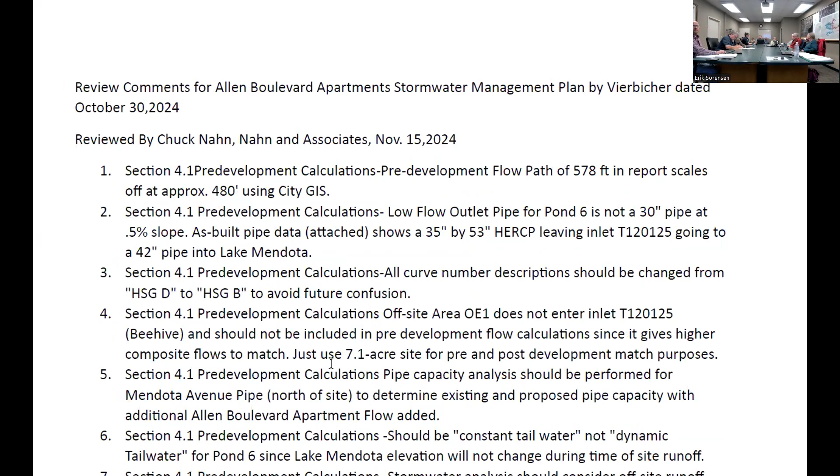Do you have some comments to make? Yeah, okay, my name is Chuck Nahn and I have been retained by the neighborhood association to do a review of the stormwater plan dated October 30th. And I have reviewed it. I have a number of comments that have been put into your packet. Some of these may be real minor comments. They can be easily remedied. Some of them might not be.

And I guess I would welcome the opportunity to sit down with Erik, assistant city engineer, Andrew, and also Elliot, maybe from the county, to work through each one of these items to determine how to remedy them, to address each one of those. Okay.

Oh, me? Okay. Dan Baruch, 6203 Lakeview Boulevard. Wanted to make sure that if you do consider fees in lieu for the Allen Boulevard site, that you keep in mind that in this stormwater ordinance it is written that if fees in lieu are accepted, there need to be management facilities downstream between the site and where the outflow is into the sensitive water body. And given the proximity of the site to Lake Mendota, I don't really understand how that could potentially happen. So just wanted to raise that issue.

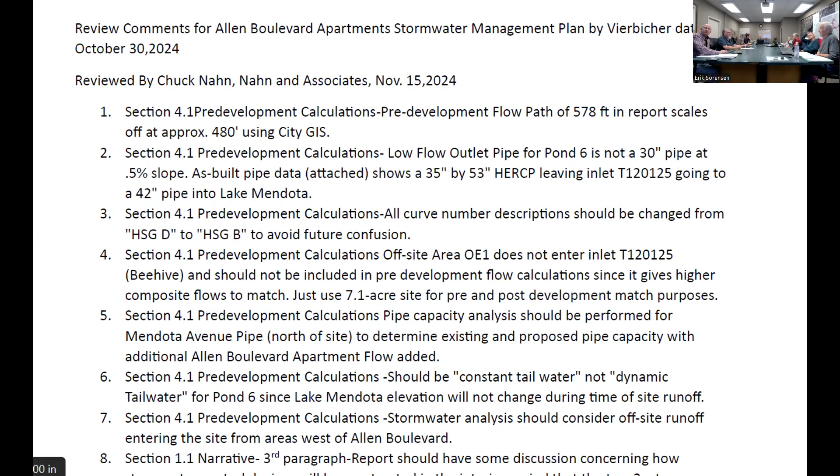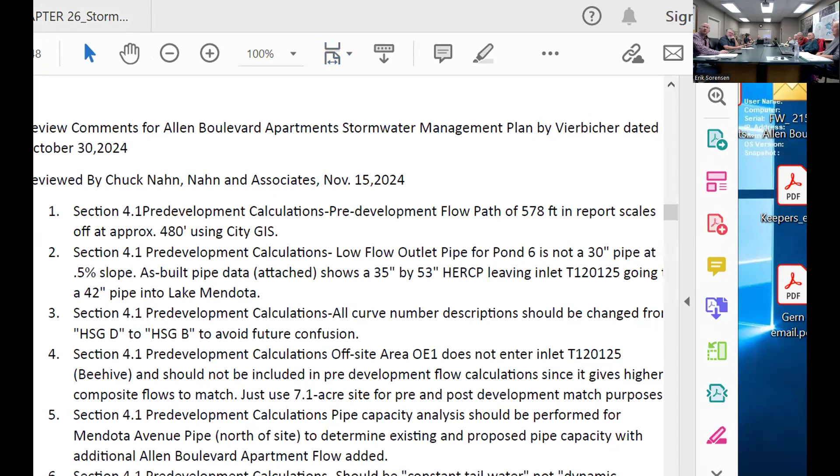I think that might apply to rate control, Warren, but not infiltration. We don't have to address it now, do we? We don't. No. If you want to look at it during the course of the meeting and find out. Well, yeah, I'm kind of stuck with my computer. Right, just can't do that. Any other comments? Okay, if not, then we'll go to presentation by the engineer.

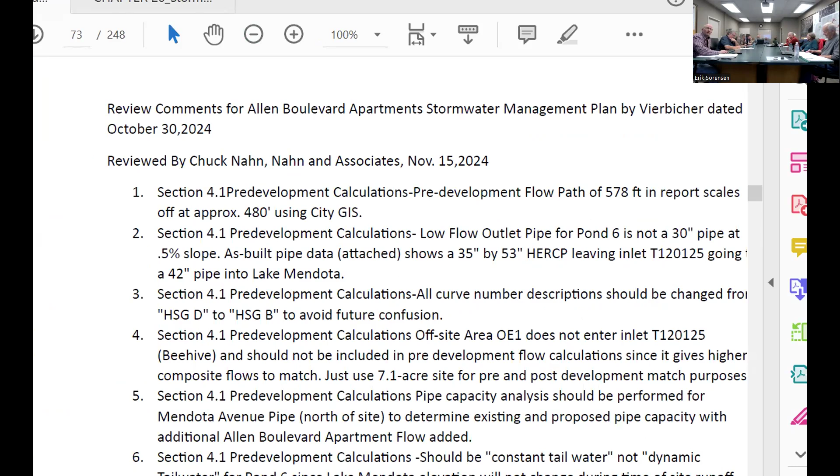Sounds good. I guess I'll start off by thanking everybody here for giving me the opportunity to run you through our stormwater management plan. Most of you are probably familiar with the site, but it's at the intersection of Allen Boulevard and Mendota Avenue. There's a CSM yet to be recorded that would divide the property into 4 parcels. 2 eastern parcels are lower density, western parcels are higher density.

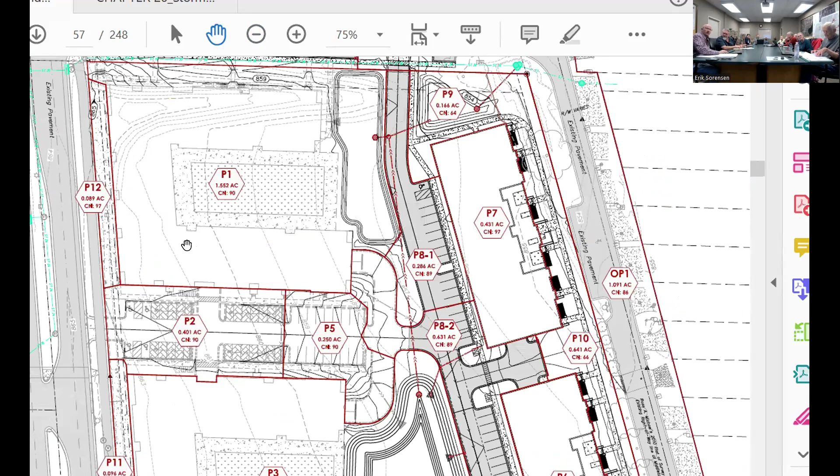And we've heard and listened to many comments and concerns from this commission as well as the neighborhood association. We have put together an extensive, thoughtful and detailed stormwater management plan for the site to try to meet and exceed the requirements for the property. We've also had many discussions and meetings with city staff, Dane County, and DNR staff to make sure that everything we're proposing here is part of the technical standards and is to the maximum extent practicable for this parcel.

I know one of the concerns when this property was discussed previously was with impervious surface ratios. I know maybe you wanted the zoning code to be a little bit lower than what it ended up being. We're certainly not pushing that envelope. Final impervious surface ratio is about 10% less than what would be allowed per the zoning code. We've also dedicated a large portion of this property to stormwater management to make sure that we're doing everything in our power to protect downstream bodies of water.

Typical site development in this community would commit 10 to 12% of the site to stormwater management. We're over 20%. And that's a large mix of different practices: bioretention, dry detention, wet detention, permeable pavement, green roof, and grass paver systems. Typically, when you request an infiltration exemption or recharge exemption, Dane County would require you to provide at least 2% of the site to infiltrative practices. We're almost 9%. Quite a bit above that minimum standard. Like I said, we're trying to do as much as we can.

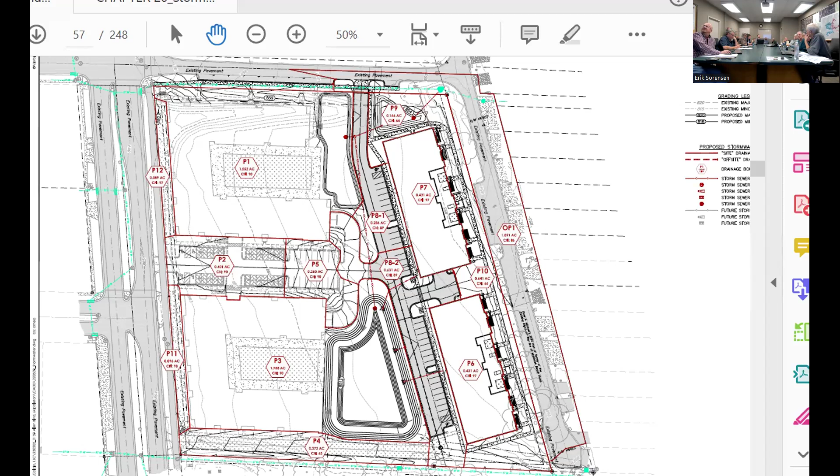And I think there are sites in the city where fees in lieu of shouldn't be allowed, or at least where the proposed stormwater management practices, I'm not convinced this is going to really solve the problems. If anything, make it worse.

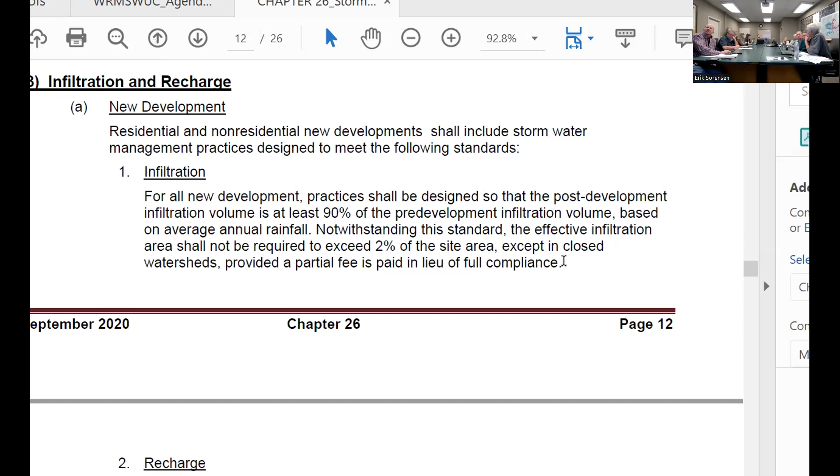I don't have an opinion on the fees in lieu. I see that the county and our staff have recommended approval of the fees in lieu request, and I would like to hear the rationale there. If fees in lieu are allowed in some cases and not in others, I think we need to have a really good reason, like a documentable reason, for granting it in some instances and not in others. So I would just throw that out there.

I'm curious, well, if we're talking about fees in lieu first, I can hold off on my other comments, but I did have some comments about the design and the pervious versus impervious surfaces.

You're absolutely right, but if we do not have concrete reasoning for what we're going to do as far as fees in lieu of, we are probably opening ourselves up to some conflict in some fashion, and I don't know what that'll be, but I don't really want Water Resources to be storming out, feeling like we've been trampled on. I think we need to try to come up with a good reason for what we're going to do, whatever that is.

I'll go along with all the comments so far. It's difficult to approve fees in lieu here, and yet the county seems to think it's okay. The county didn't approve fees in lieu, they just said the stormwater calculations are correct, you meet all the requirements except for this. Right. That's all. They don't say anything about fees in lieu; it's particular to the Middleton ordinance.

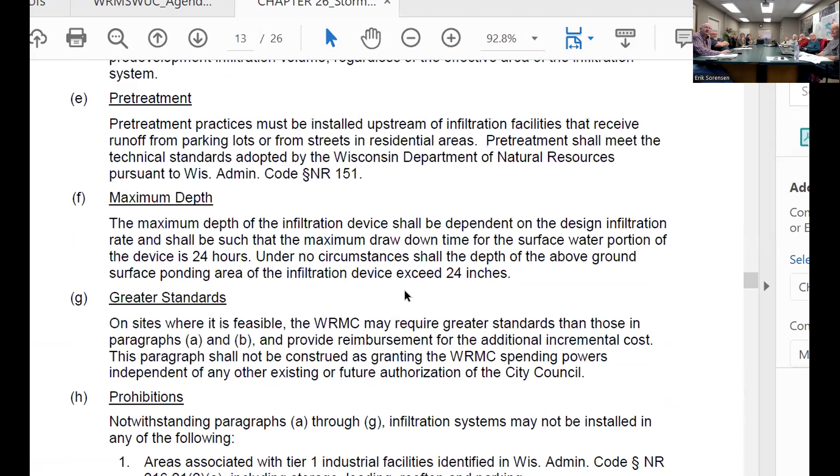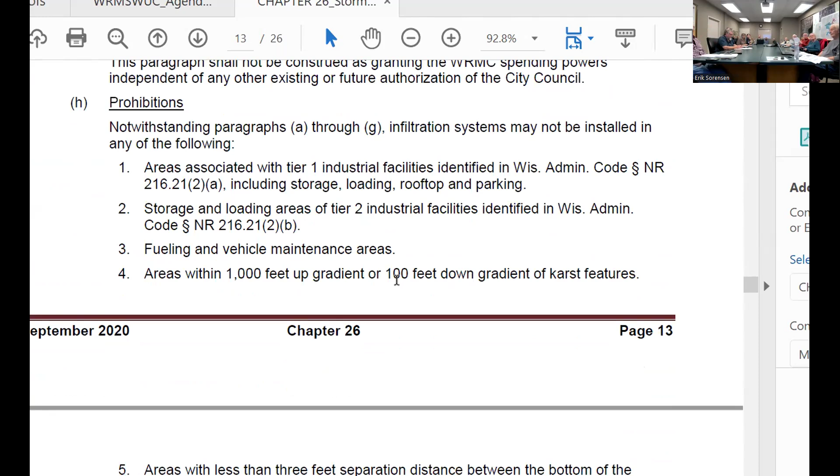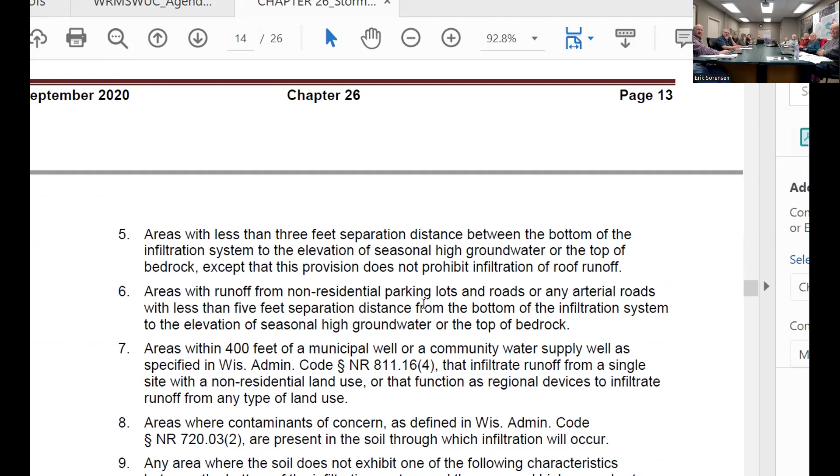Yes. And what I put up on the screen is a section of chapter 26. We're talking about the infiltration and recharge performance standards. We list these as prohibitions, and these are all the areas where we don't want to infiltrate water. What's applicable here are these soil condition restrictions, less than 3 feet of separation distance to high groundwater or bedrock. And then there's another one with 5 feet depending on the soil characteristics, and that's what the site's not meeting.

I think fees in lieu just kind of sounds bad, and when the public reads that, they think we're saying just give us money and you can get out of your requirements. That's not the way I see this. If we were in Verona or Sauk County or somewhere that doesn't have a fees in lieu standard, the site would still be exempt from infiltration due to the poor soils, but they wouldn't be paying any kind of fee in lieu.

When we had Greg Fries here on the ordinance, he talked about Madison; I believe they don't have fees in lieu of. And we asked Greg how they handled it. He said it was a discussion between the city engineering staff and the developer to meet the requirements, and they had a give and take type of procedure that they use. And that seems to make some sense. It gets rid of this feeling that we're just giving away something.

And I guess that's what I recommend here. We don't use fees in lieu of, but have the developer sit down with you and staff and find a way to come closer to meeting our requirement. I think the intent in the 3 years that I've been here is the developer makes a fees in lieu request, and then it has to come before this commission.

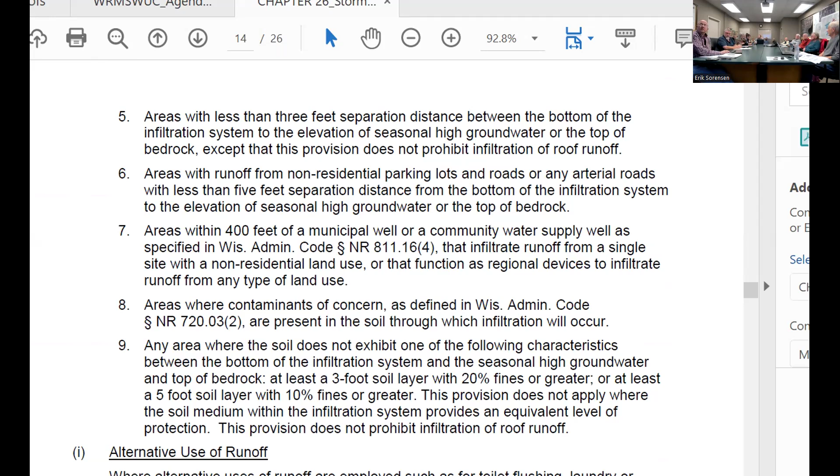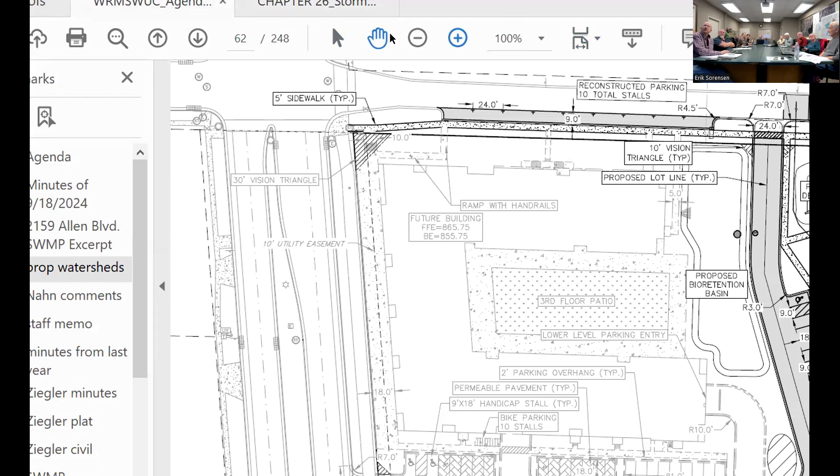Well, and that kind of tees up some questions I had about the design itself. Eric, can we go back to? So I'm looking at page 62. Okay, yep, and if you could zoom in. Much bigger than that. I had a question, so in the plan commission, our recommendation for one of the policy questions was to get rid of the perpendicular parking. And I think when I participated in that discussion, I pictured the parking going away and not necessarily being replaced with parallel parking. So are you planning to take that out?

What's shown here is to replace the perpendicular with parallel. That's what we gathered from that plan commission meeting. We're not using that parking for any parking requirements. We have no preference on whether it stays or goes. That's up to the city. We're gonna be doing work there, so if you want parallel, we're happy to make that replacement. Are you talking about on the road right of way? Yep. Right now, there's the perpendicular parking for soccer games and stuff.

But the question that came before the plan commission was, do we need to keep that now that there's going to be on-site parking and not soccer games? And we were inclined to say, no, get rid of the parking. I don't know if that's considered the right of way. It's right of way, right? I had heard that the intent was for some kind of first floor retail, and that was the desire to keep some amount of parking. Well, but isn't there going to be parking for the commercial on site? So that's not needed. And in front of the apartments, did you want the parking there? We don't need it. We're open to whatever the city and neighborhood would like to do there.

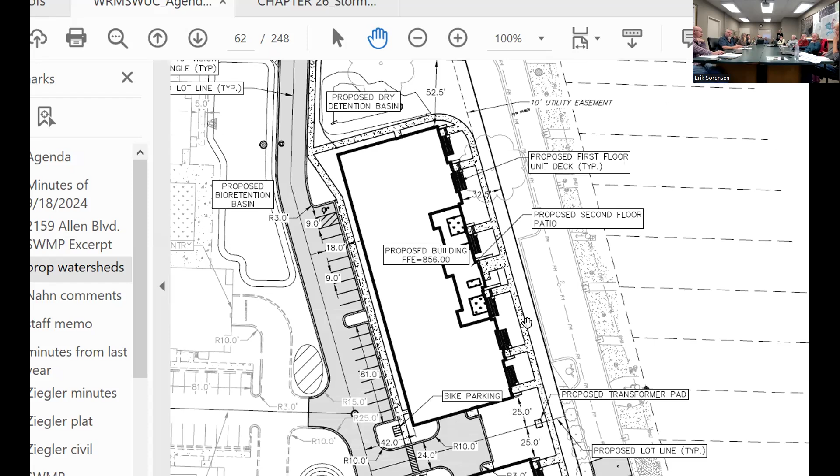I just want to clarify one more thing. On that parallel parking that Lisa referred to on the street, that is not even part of our runoff calculation requirements. They're outside the property boundary, right? Correct. That is an issue to be decided because, as this is shown, there is a reduction in impervious, even though it's within the street right of way. Same thing would happen over here.

And the sidewalk too, one of the comments from engineering was that sidewalk should go around. Right. We would prefer to have this sidewalk placed into the right of way. So when I said in my memo I have numerous comments, they are details similar to what Chuck Nahn provided, which is probably too much for this committee to get into. And there's a lot of things still in play here with the land division, with what happens within the right of way. To me, it's all part of the same design. If we're adjusting how we treat what's their impervious, what's our impervious, what they're responsible for, what the ordinance requires, that gets pretty tricky.

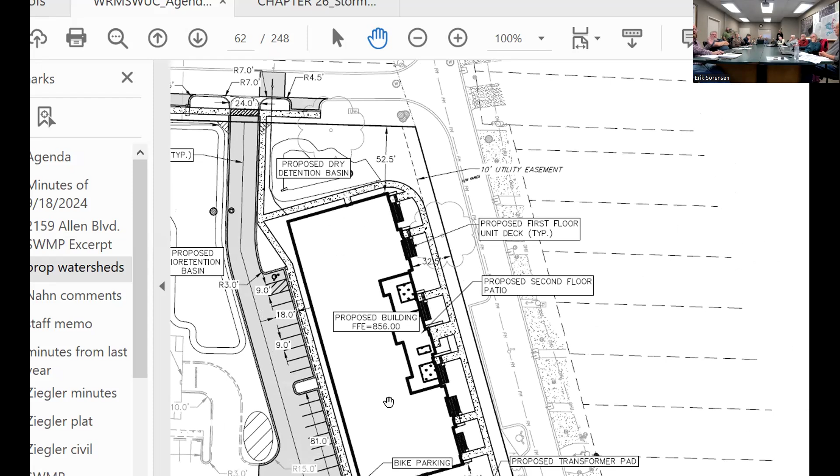But I think I've expressed my main concern with this site is what happens to the receiving storm sewer. Middleton Beach Road is gonna act as a dam after you get above a certain storm event, and there's no real good way to fix that at this point. So this needs to be the point of comparison, what's happening along Middleton Beach Road, making sure we're not exceeding what's happening now with storm flows, flood flows, because there are no culverts under Middleton Road. Well, there's a culvert through here that goes to the lake.

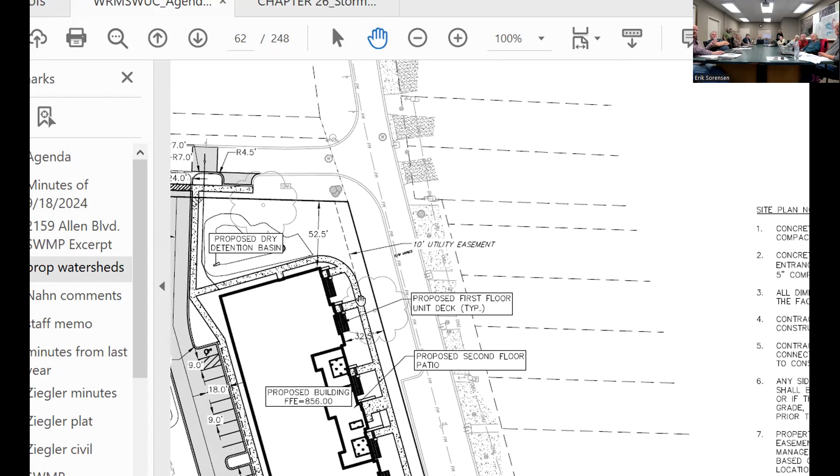Maybe if you'll indulge me. This is a map I prepared a couple of years ago. This site is right here. Each one of these little nubs is a storm pipe. So we've got one right along the edge of Marshall Park. We've got one that comes down Mendota, and that's got the smallest watershed associated with it. And then the biggest one is a pair of twin pipes that come through right here, kind of opposite of Maywood. So it's what's happening with this watershed, that's the concern. You can't enlarge that culvert at the upper end of that. We don't have enough space to do hardly anything at all.

You mentioned to me that the 200-year flood actually shows an increase. Is that right? I think I might have said that the design Drew provided still shows slight increases at the point where I want to make the comparison, which is the 30-inch pipe right before it passes underneath Middleton Beach, right here. And using the present 100-year flood calculation, we've already realized that probably is not accurate because they're using rainfall data that's probably outdated, and the 200-year flood is probably more like the 100-year flood. Well, we're required to go up to the 200-year now, because that's what the county ordinance says, so we have to follow that too. So that's a concern that can't be rectified with this plan.

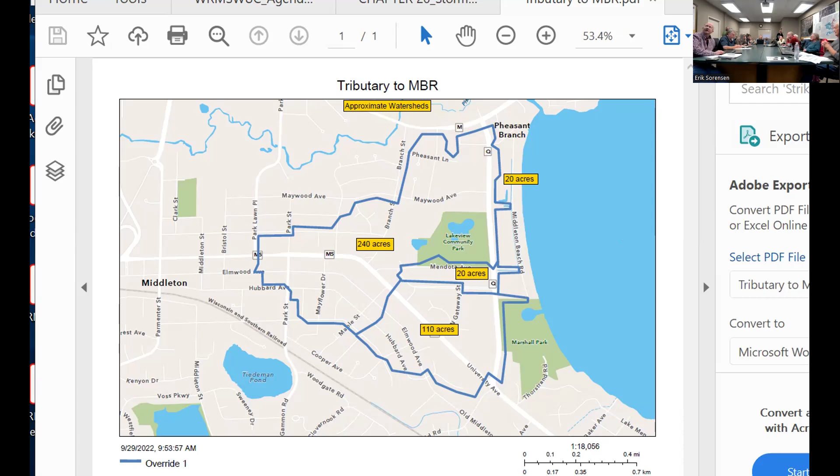Aren't you matching the 200-year event? I was gonna say, Eric, can you show us where in the packet? Because I thought it was all but the 1-year storm. But 1 year's a problem too. And you had said, Eric, with some of the changes you were gonna suggest, possibly the 2-year. Yeah, we're talking about two different points of comparison. Okay.

I have this bookmarked in this version. Page 4, yeah, you're at. So I think, and Drew, maybe you can correct me if I'm wrong, the depression represents that point of comparison that I'm talking about. Correct, yeah. Oh, well, I stand corrected. He is underneath it. Yeah.

But that is only what's overtopping. That's the overflow line, the secondary. Total discharge is what's coming through the pipe and overflow, and that is also decreased in the 100, 200 year. Okay, I stand corrected. Where's the overflow point? The overflow point that I found is a couple of lots south of Mendota Avenue. It's very flat in there. It's either directly over that storm pipe or it's a couple of lots south of that storm pipe.

Yeah, and there could be multiple overflows. We could try to shunt some water across Mendota and push it into the wetland. There would be impacts to that. Yes. Pipes that exist up there, I assume, are pretty much flat pipes, right? Not much grade to them. Correct, and they're all partially submerged, no matter what the lake condition is. Fully submerged, I think, when it's at flood elevation. How do you get water through it? You have to pile the water higher on the upstream end.

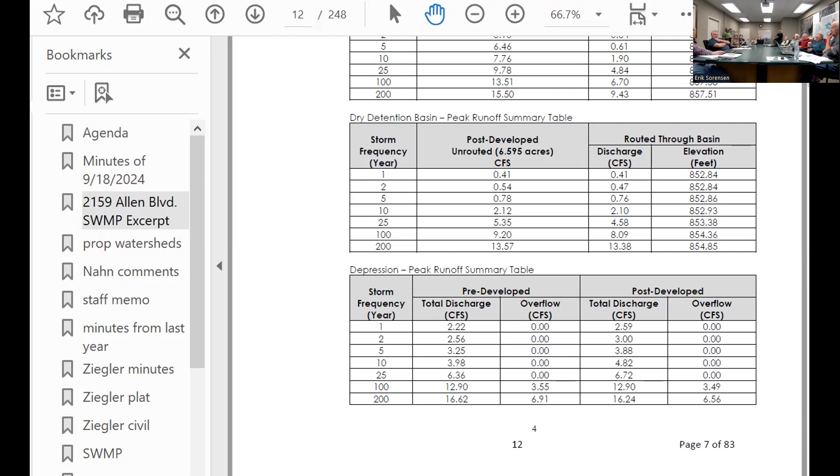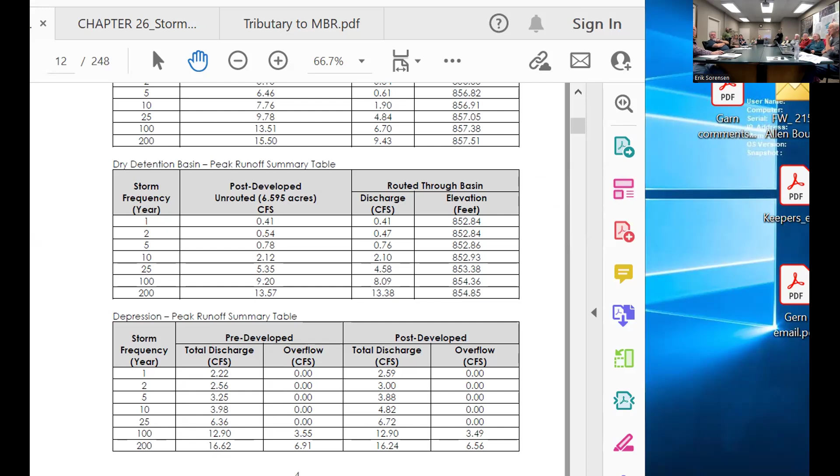We were sent pictures of one of the residents on Middleton Beach Road of flooding that occurred this summer. Was that overflowing Middleton Beach Road at that time or just ponded on the soccer field? In one of the emails I forwarded to you guys, the resident was talking about overtopping between his house and the neighbors. This set of pictures is primarily the west side of Middleton Beach Road in the tree line, and it's a poorly drained ditch. We cannot solve all the problems on Middleton Beach Road, certainly not with this project. We don't want to make it worse. Exactly. That's the intent, to not make it worse.

So I think the report shows that we're matching or improving conditions for all those peak flow events except for the smallest of storms. And the only reason that we cannot meet those is because of that small area that we're not able to capture, because it's directly coming out to the road. You're improving it because of the storage basins that are planned. Yeah, the extensive storage basins. Like I said, 20% of the site is committed to stormwater management.

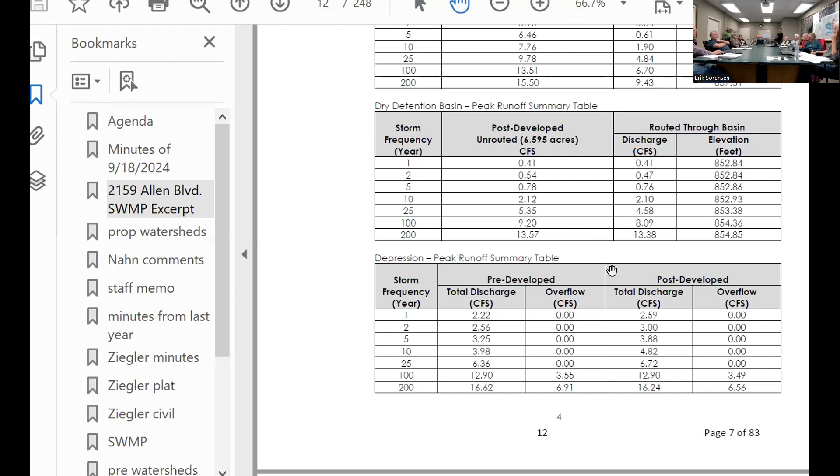What kind of landscaping will you have? Because I know the chair was talking about evapotranspiration, and I think your calculations assume that anything that's not impervious would be lawn. Right. Yeah, we have an extensive landscape plan. Our landscape architect loves using perennials and trees and shrubs. What about native plants? Yep, lots of native plants. I can definitely share this plan with you. The root length, that will make a difference. Yeah, that's why we would go with perennials and native plants. Turf grass doesn't infiltrate very well. Right. That's why my proposal is for green infrastructure. Work with the city and try to improve that, so you come closer to meeting the infiltration requirements.

Yeah, and we would love to expand these basins, but we're just controlled by that groundwater. There's areas we're not allowed to infiltrate. And higher by Allen Boulevard, it's impossible to do any kind of infiltration or porous pavement up there because there's no water to capture. Right, yep. That's the upstream side of the site, so it's hard to make water go upstream.

Are you planning on a liner for the pervious pavement? Pervious pavement will not have a liner. Where we placed it, we have the required separation. The only place that we have a liner planned is the bioretention basin, again just because the groundwater is shallow in that location. We don't have the required separations for DNR. So this is the bioretention basin and bays of pervious pavement. And if you notice, they're relatively high, and the parking lot dives down quickly to this lower tier of the site. And these roofs are draining back into the ponds. As he's shown it, the only thing that's draining towards Middleton Beach Road directly is just the face of the building to the east.

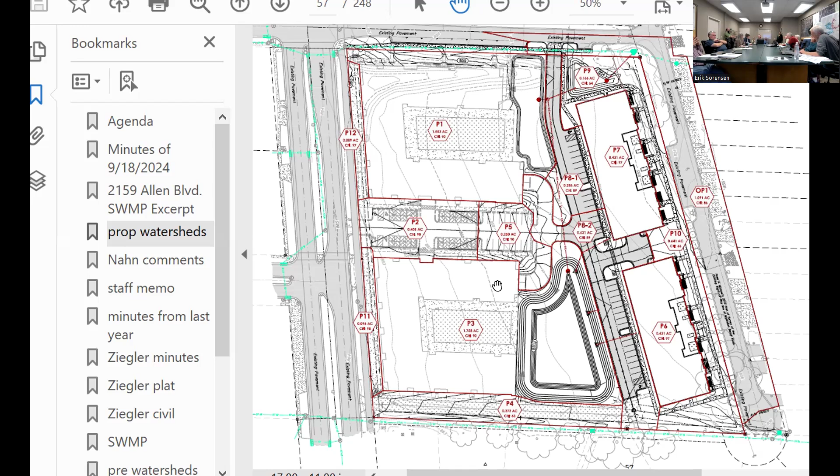About 5% of the site is green. Not 5% of the buildings, 5% of the entire property. What percentage of the buildings? I don't have that specific number. I know that on the larger buildings, we're proposing that 50% of the amenity space, that middle section, is green. We show roughly on current plans where those green roofs are planned. In addition to the green roof, over 1% is porous pavement, 3% is grass pavers, 3% is bioretention.

In addition to that, kind of non-green, if you will, would be 8% wet pond and 1% dry pond, I guess over 20% of the site committed to stormwater management, well in excess, almost double of what you would typically see on a property of 10 to 12%.

I have another question. What are you going to do to keep any water from going into the wetlands on the other side? That's not what the drainage pattern does. The drainage pattern overtops Mendota in the extreme large events, as it does currently. Or, sorry, Middleton Beach Road, yes. Yeah, the city has worked on restoring it. It needs a lot more work, but it's a very fragile, unique, perhaps a calcareous fen even, which is very rare. So we don't want to do anything that will damage that.

But there is no drainage to the north on this. No, but I'm talking sideways. Yeah, to the north. If it goes over the road, it will go into there. No, I don't think so. No, it goes east, across the road, as it does. Right now, I think, Susan, there's maybe 6 inches of difference between where it overtops Mendota Avenue versus where it first overtops Middleton Beach Road. Okay, so a huge flood could be a problem. Yeah, 2018, perhaps. It's a problem all over the place.

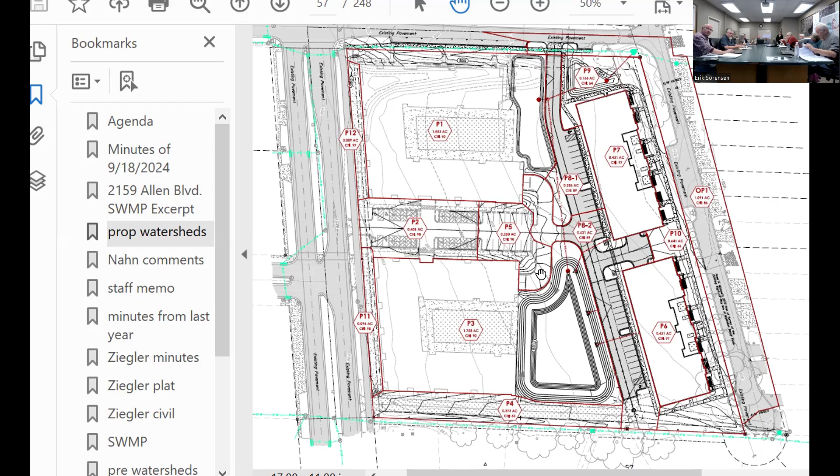Yeah, so the 1-year right now is a quarter CFS; under post-development it'd be 0.48 CFS, right? And the 2-year would be 0.6 in pre-development and 0.68 in post-development. 0.63 of that just being the portion along Middleton Beach. We think we can measure these things like this. Right, exactly. And if we were to use the C or D soil comparison, we wouldn't even have this problem. We'd be meeting those peak flow limits. I know, but numbers are numbers.

Those two numbers, as far as impacts go, don't bother me at all, and if it's a fee in lieu, that'll get around that. Or are you asking Eric that there would be some changes in the curve numbers and recalculate this table? Yeah. And then those new numbers would be missing the 2-year storm also. See that 0.08 increase. The 1 year doesn't change very significantly. I always think a quarter CFS is a 4-inch drain tile. That's about the flow out of it. Okay, just to help visualize.

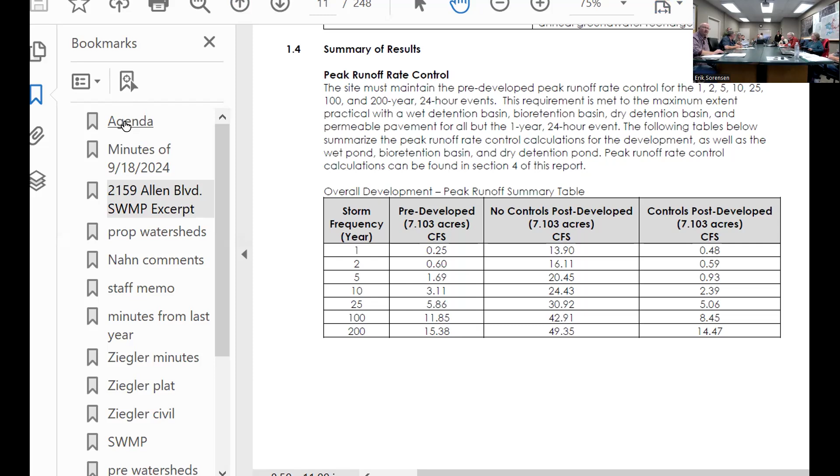For now. We've kept it going like an hour. Yes, I think we should take a recess, a short one? About 10 minutes? 5? Thank you, Lisa. 5 minutes. I'll second.

Thanks, Chuck. No, it was not. Thank you. There's still people in there. Getting a little warm in here. It's small. It was warm when we got in here. Well, that's perfect. I wasn't expecting that much. Why don't you come up to the table? Got to be a more comfortable chair. I was taking care of the little one that day. $2,000-3,000 here and there. No, I asked for the Greenway Center.

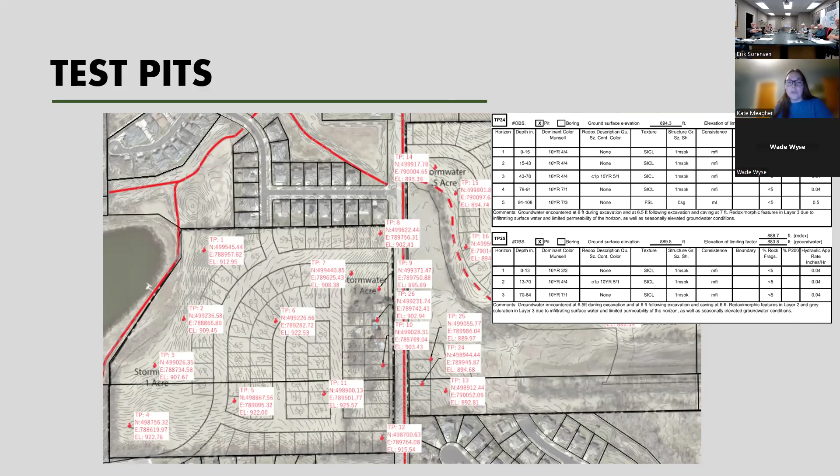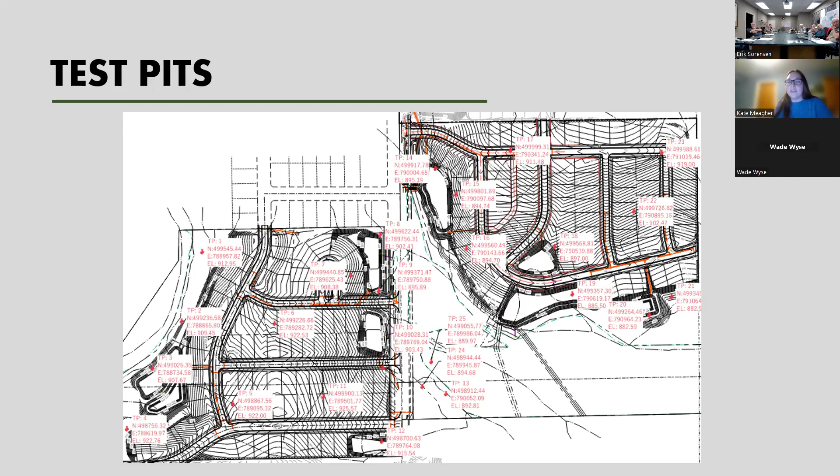So you can see these test pits 25, 24, and 13 are in this corner. And in this corner, there was previously development shown, but the infiltration rates here were low, and there was a high elevation of seasonal groundwater. And so we looked at multiple layouts, but ultimately development of this area was removed due to the restrictions of the infiltration. So this is kind of just an example: here's the current layout with the same test pits, and now there's no development there, and how the information of the soils has really guided the development of this plat.

So this is our proposed watersheds. So again, there's the 2 major watersheds. There's the Graber Pond to the west and High Road and the eastern drainage way to the east. The eastern ones of High Road and the eastern drainage way were separated for the peak rate, just to maintain that the High Road peak rates were not going to overtop High Road.

So for the western watershed, there's a wet pond and infiltration basin. Along High Road, there are 3 bioretention basins, and they capture runoff from this area as well as the discharge from this existing pond in the Spring Hill Estates. And on the east side, there's 2 bioretention basins, a wet pond, and an infiltration basin.

And the storm sewer from Red Tail Ridge, which discharges in this northwest corner up here, as well as discharge from the overflow of Graber Pond and Misty Valley, are all going to be passed safely through the site, but not captured by any stormwater management.

So the first requirement was peak runoff rate. And so the peak runoff rate modeling, again, was split up to analyze pre and post for the Graber Pond watershed, the High Road, and the east of High Road, that drainage way area. There was a small increase to the eastern drainage way, but that's just due to the areas that cannot be captured by any stormwater management facility due to the grading of raising the basins high enough so that they have separation distance from the groundwater levels. And when combined with the High Road and the overall total site, which is where everything eventually drains eastward anyways, there's no increases to the overall site.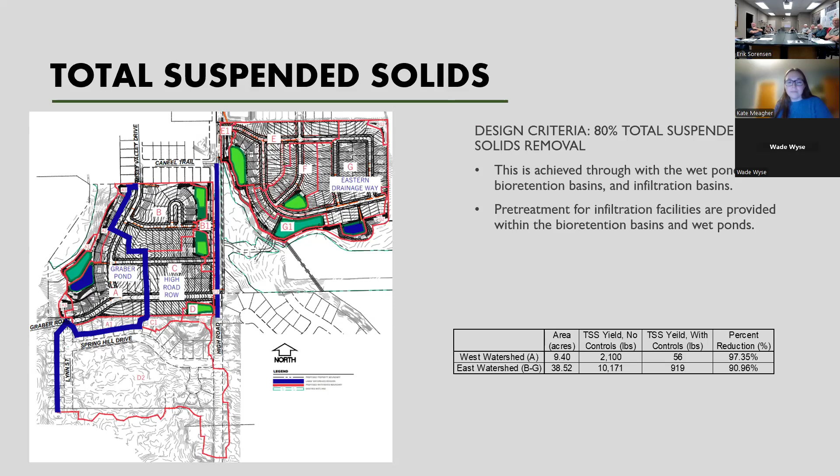And the last part is stay-on. To get to stay-on for 100%, we are assuming, based on previous developments in this area, that 100% pre-development stay-on is going to be required for this site. To reach that, we are requesting the credit of the infiltration of offsite runoff to meet that 100% goal.

In doing so, we've talked with the city about how much credit we can take for the offsite runoff. The credit we've talked about is that we can only take credit for runoff volume over the 100% pre-development stay-on volume. So the offsite runoff has been restricted to assume that the offsite areas are meeting the stay-on assumptions listed.

Using these assumptions reduces the amount of runoff draining to the site. So this reduces the amount of runoff provided on site to those offsite areas, and this provides a more conservative estimation of the amount of infiltration provided to the offsite areas. While the offsite areas are completely developed and currently have no specific infiltration features, I think later on you're discussing potential improvements to the Spring Hill Estates Pond to maybe help provide infiltration.

But given that there's no current infiltration, it's going to be hard to reach that 90% goal. But we're assuming that it is reaching that 90% stay-on goal, and so only the runoff volume beyond that is being calculated as running off onto our site to take credit for that infiltration.

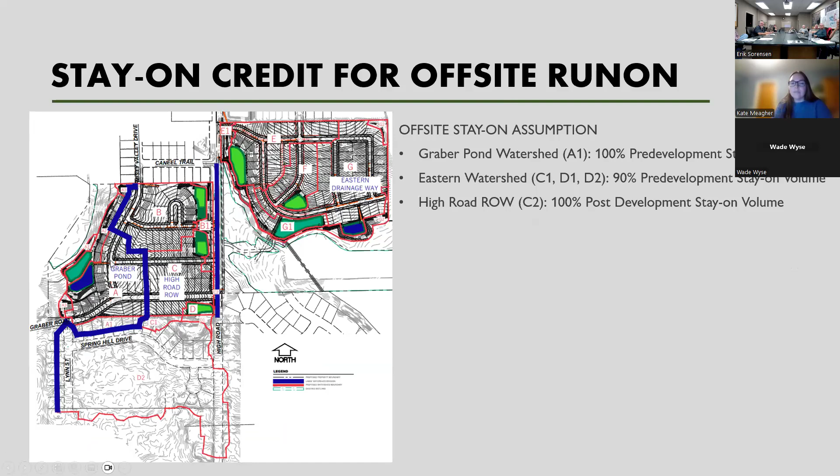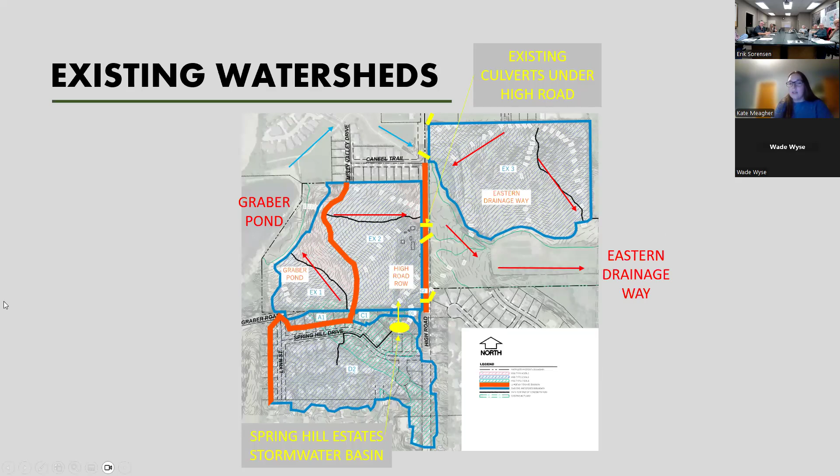Just to clarify, the surface watershed divide between Graber Pond and the rest of the site, is that pretty much following what the current topography shows? Yep, it's pretty consistent. I'm trying to go back a couple slides. So this is the existing Graber Pond watershed, and this is the proposed. You can see in this graphic the pre versus post. The pre-development one has 8.9 acres. The post-development one has 9.4 acres. So there's a slight increase to the watershed.

Kate, I have a question. There's no additional water going into Graber's Pond then from this development? That watershed just got bigger by half an acre. Yep. That's what I thought he said. Yeah, okay, you're right, you're right. So you look at impact on Graber's Pond, then it would be nil as far as this development's concerned.

Well, it would be nil for the infiltration level events. But in a 100-year storm, you'd have a half acre more of volume, plus all the additional volume from the impervious area of the development. Yeah. So over the course of the year, we will see more water going into Graber's Pond. Not over the course of an average annual year, on the 1-year frequency. But yeah, same problem as we've had with anything else, any storm that's roughly above a 2-year, there's more volume over the surface and into Graber.

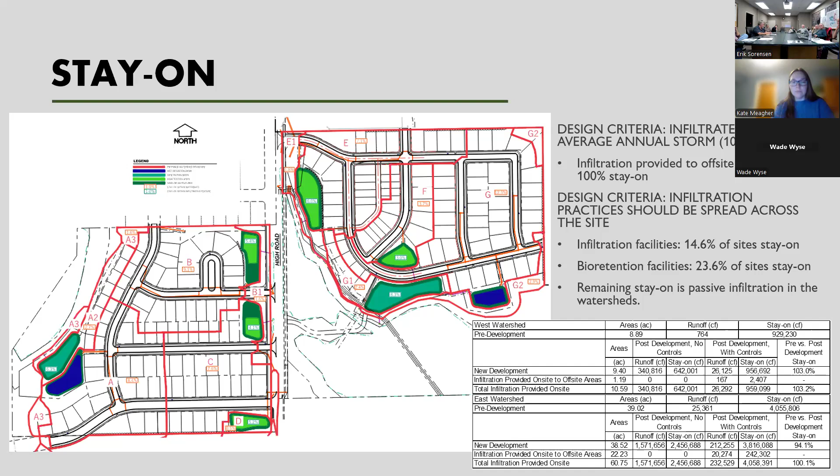Hey, can you go back to maybe your second or third slide? Yes. All the former Ziegler property is now conservancy lands, all the way over to Branch. Yeah, there's one sliver that belongs to the city, and then there's another larger parcel. Yeah, that one. It's owned, but it's owned by a defunct development company. And it'd be great if the city could acquire that. Yes.

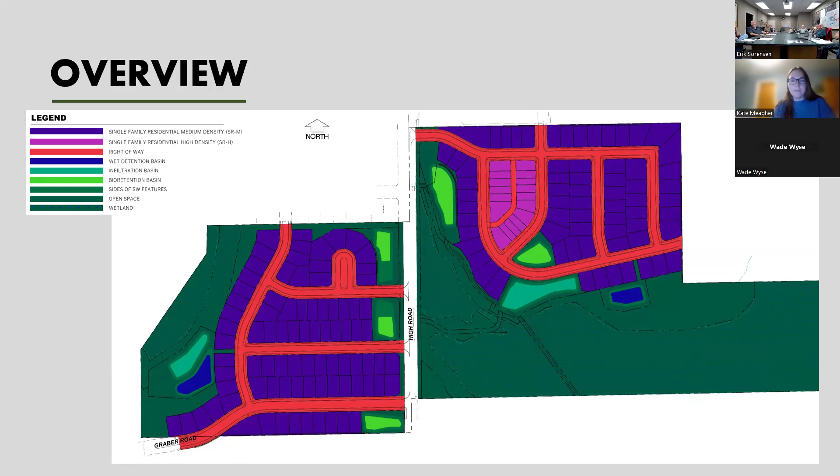So the right-hand border of that green rectangle, is that basically Pheasant Branch Road? I think it might be cut off. It is a little cut off, but it goes, yeah. Okay. Yeah, it's slightly cut off, but Eric, if you let me share, I can show a graphic that I think describes what you're looking at. You can share. Okay.

This is kind of the concept plan that's been routed around and discussed at all the other committees. So you can see, yes, the Ziegler property extends over to Pheasant Branch Road in this location. The tract of land that's potentially being pursued off-site and not part of the Ziegler land is this area down here. It's being pursued in discussions with the city. It's an outlot for the Pheasant Branch Ridge subdivision, but it's the former development company, and it's not in business anymore. Is the land developable? It's all wetland. We zoned it as conservancy as well.

So that's the area that water flows through. There's no channel now? No, the channel is located on the Ziegler property, and then there's a couple of side draws that bring it to the north from Pheasant Branch Ridge. It doesn't flow through the middle of this area here. No, right where it's showing. Its culvert then is here. Yep. Is that culvert gonna be big enough?

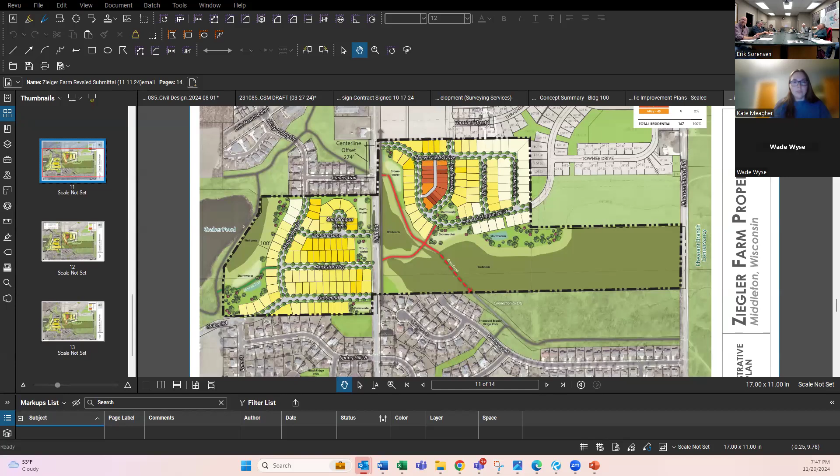Thanks, everyone. Thank you. Thanks, Wade. Okay.

Next item then is, I'm at 10. It's a presentation from MSA on a contract amendment to do a lot of work for what I'm calling the Graber Greenway. Jeff Felland is here. Jeff, why don't you make a presentation? And then I'll have a couple things to add, maybe. Okay. Or I might jump in. Good evening, everyone. Nice to see you all.

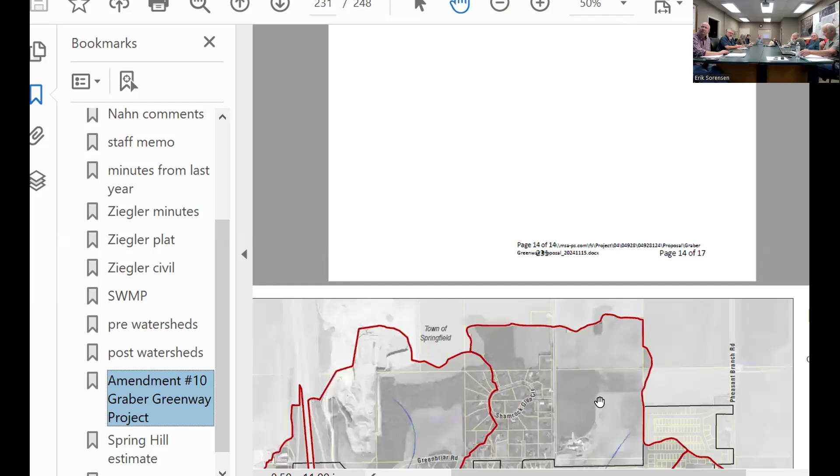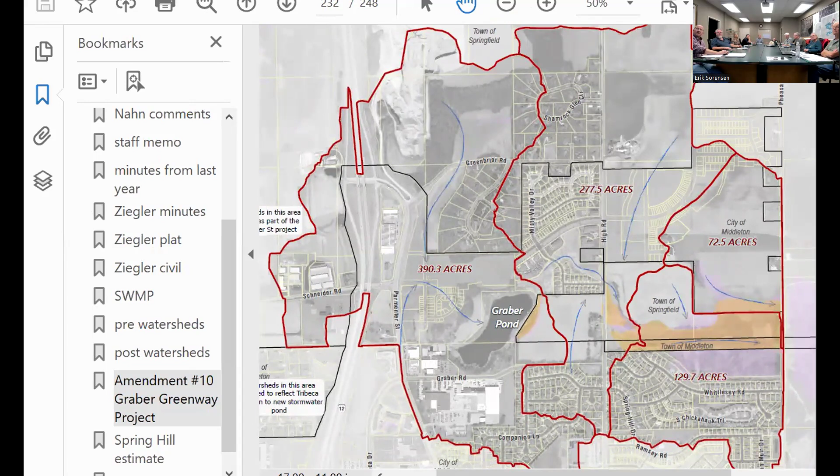So at Eric's request, MSA has put together a proposed amendment to an existing contract that covered Graber and Tiedemann Pond outlet studies or flood elevation studies. So as he mentioned, this is more of a watershed level of projects comprised of a number of different stormwater management and habitat enhancement features. The figure Eric has up there now is the current Graber and portions of the Pheasant Branch watershed that really encompasses this idea as we're going to define it today.

But before we get into the details of the components of this amendment, I want to go back a little bit and revisit MSA's partnership with the city in this region. Our first efforts in this area were back in 2016 when we looked at a few stormwater management ponds at the south end of this figure. They were talking about that in the previous one, Spring Hill Drive, Pheasant Branch Ridge, Spring Hill Road. There's some existing ponds, the two Pheasant Branch Ridge ponds, and further west that the previous presenter was discussing. We did some evaluations of those ponds for retrofitting to get improved stormwater management.

Our work specific to Graber Pond in the Graber Pond watershed started in 2019, where we had a contract looking at establishing and evaluating flood elevations in both Tiedemann Pond and Graber Pond. That was due to the flooding that was being experienced at National Electrostatics, the southwest corner of Graber, and then also some residential homes along the overflow path between the pond outlet and Misty Valley Drive. The city was looking at studying a way to design and implement an outlet structure for Graber Pond to try to reduce that flood risk for those properties.

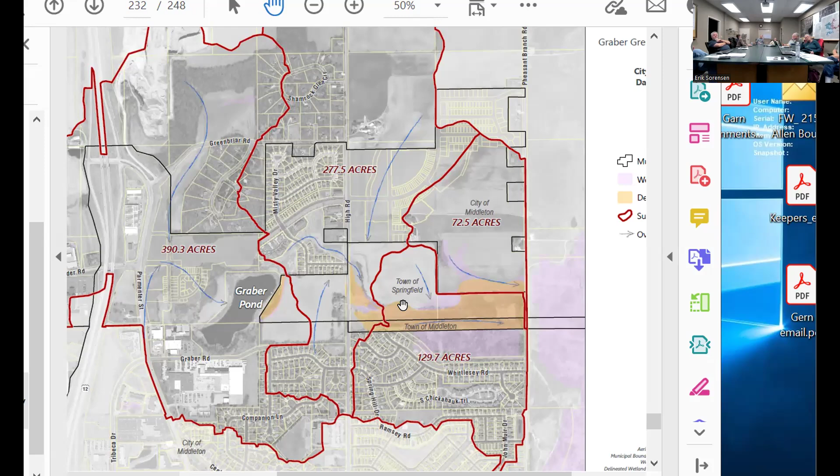properties along the greenway. So then there's another map, Eric, the next map that shows some labeled polygons. And this is really a map to help you all understand where these components are within the greenway. And so real quickly, I'll run through what the component is, what the issues are, and then what the expected benefits would be to implementing the proposed project component. So again, starting off with number one there, that's a combination of the Graber Pond outlet structure and the Misty Valley Drive culvert upgrades.

So that effort would entail working with the DNR, figuring out whether a lake level order or a public rights stage would be established, so that we can use that as a boundary condition, or continue discussions with them to allow an outlet invert below that level. And then improve the culvert capacity at Misty Valley Drive. So the outlet structure and the culvert upgrades in conjunction would be implemented to reduce flood risk at National Electrostatics and some of the houses along that overflow path just upstream of Misty Valley Drive.

The second component is the Misty Valley Stormwater Complex. So we would be evaluating the performance of that complex as a whole to see if it is still providing the stormwater management it was designed to provide and was stipulated under the stormwater management plan that led to the permitting for it. For component number two, the city has asked MSA to examine an infiltration basin that doesn't appear to be infiltrating per the original design. So we'd be doing some test pits within that to evaluate the soils and see if the infiltration is, in fact, being limited.

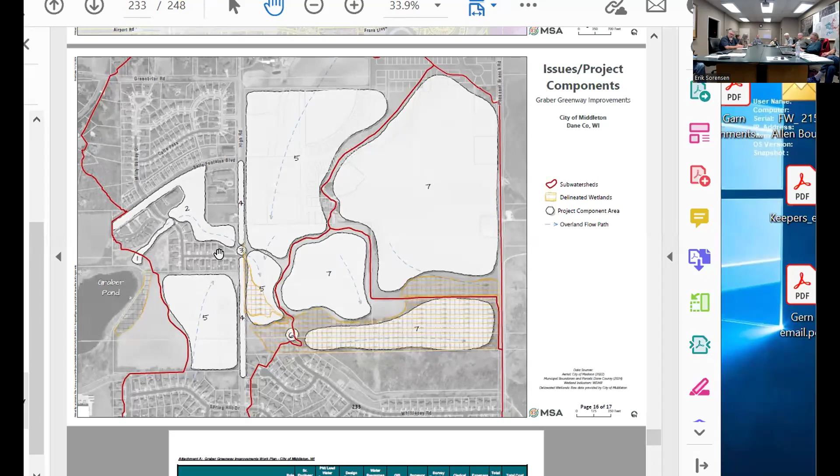So that brings us to that wetland shown in the middle polygon labeled with the label number 5, just to the east of High Road. I think this was discussed in the previous presentation. So the idea here would be to enhance and restore the existing wetland there. There's some adjacent areas that are being used for agricultural purposes. We have to be careful that it's not proposing to expand them, but to restore and enhance what's there.

And the idea is trying to implement some grading practices, sometimes known as a wetland scrape, to try to increase the volume available there, to attenuate some flow and allow a little bit more sediment settling to improve water quality. You'll note that there are a couple of larger number 5 polygons. These represent areas from the Ziegler Farm and the Red Tail Hawk development that will be draining or outletting to this wetland. So to your earlier comment, Lisa, the expectation is that there'll be additional volume coming into this wetland area. And if we can make some improvements and enhancements to that wetland area to accommodate some of that increased volume, that would be the goal.

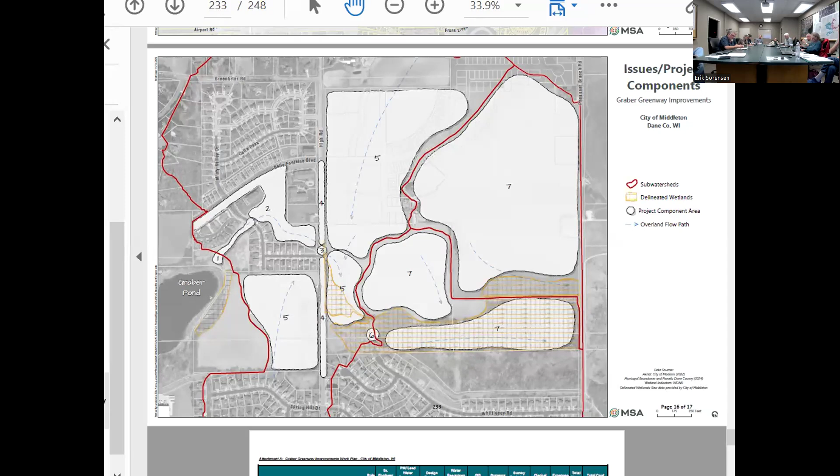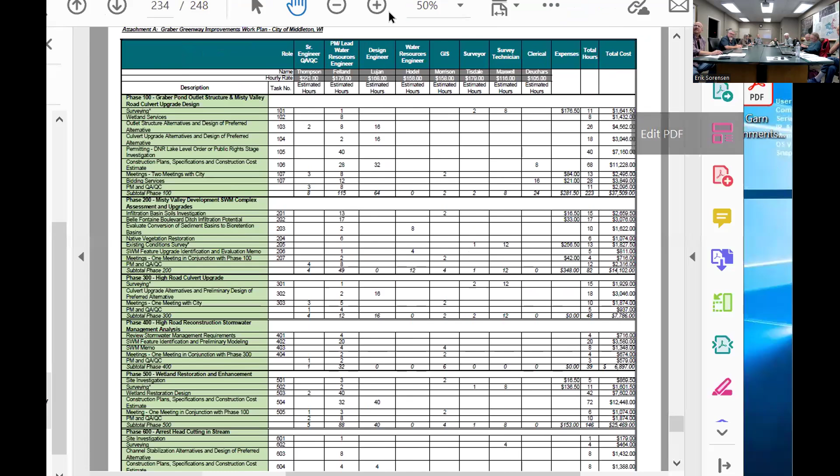Again, the big picture here is I've separated these out a la carte style to a degree to help folks get a handle on costs and level of effort of each, but they're all interrelated, right? You can't separate what's happening upstream from the downstream. And that's the approach for having these different components included in the Greenway, and that'd be the message for the permitting discussions with the regulators. While there may be impacts to individual components, we'd be looking to stress the net benefit to the greater Greenway and watershed area, as well as the downstream receiving waters.

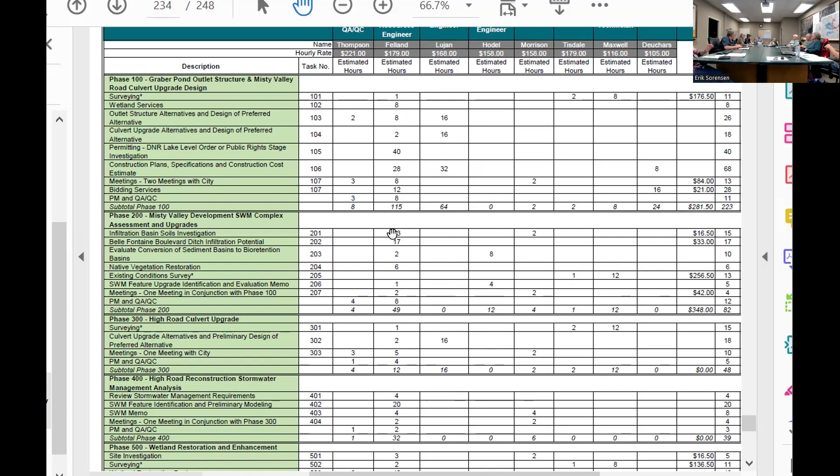I'm pleased that we're looking at this thing as a whole system; we've been chipping away at chunks of it for 7 years now or something like that. And I also saw you did have scope in there for a meeting with stakeholder groups, Friends of Pheasant Branch, which sure is a good idea. And that'll take place throughout, correct? It was phase 800, but that doesn't mean you wait until the first 7 are done. Right. That's just separate. 800 was just a summary to make sure folks get a handle on the number of meetings. I felt it got a little confusing in my scope, trying to figure out which component's going to have a meeting and which one isn't.

A lot of these components, like Graber Outlet, can be met on and discussed at a single meeting, but at some point there's probably going to be too much to get through in one meeting. So I said, okay, these couple of components go together. Same with the bidding, right? The idea is that the more components that could be wrapped up and bid together in a single plan set, a single permit application package, there's economies of scale that can be realized to reduce the overall costs. But again, it's hard at this stage to know what the city might ultimately want to do. They're going to pick and choose certain things. I do think component 7, the floodplain reconnection effort, I've kept as a separate thing, a separate bidding process.

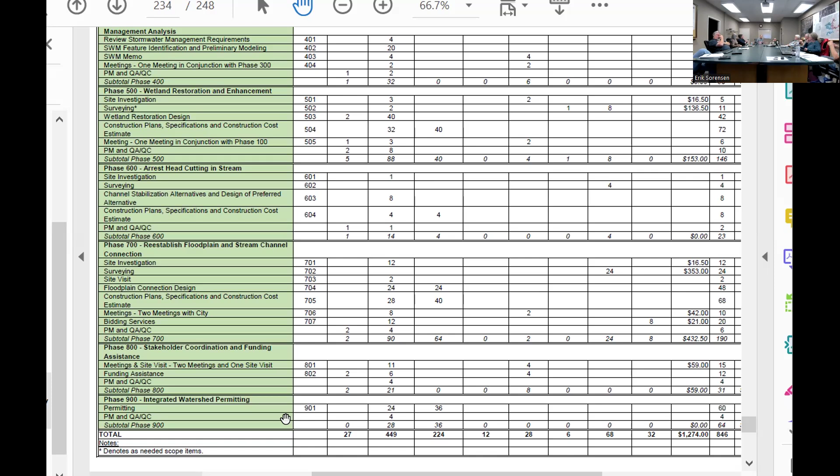But until we work through the process with the DNR, it's hard to tell what exactly it's gonna do. Don't you think we should make a recommendation what we want to start with? We want it as a storage facility? Well, we can't dictate what the DNR is gonna do. No, but we could recommend that we would like to consider this as a storage facility. It's a storage facility, no matter what we recommend. I mean, to a certain extent. Yeah, if it's at the level of the invert, if you draw it down a foot or two, you get more storage. Right. And shouldn't we go to DNR with a plan that we think is desirable? Well, I think that's what this proposal is doing. Okay, that was the question.

And what are we gonna do for flow values? Are you looking at studies you did before on discharge values? Well, yeah, we've got a watershed, the hydrology of the watershed model, so we have an idea of what comes into the pond. And are you then gonna update that model you did before? I don't envision there'll need to be much updating because I don't think much has changed, if anything, in the Graber Pond watershed from our last round. We accounted for Bell Farm, we accounted for the Tribeca diversion, and we accounted for the Parmenter Street improvements. Now, sorry, let me back up. Now it sounds like there's Ziegler Farm development, so we'd have to update for that, right?

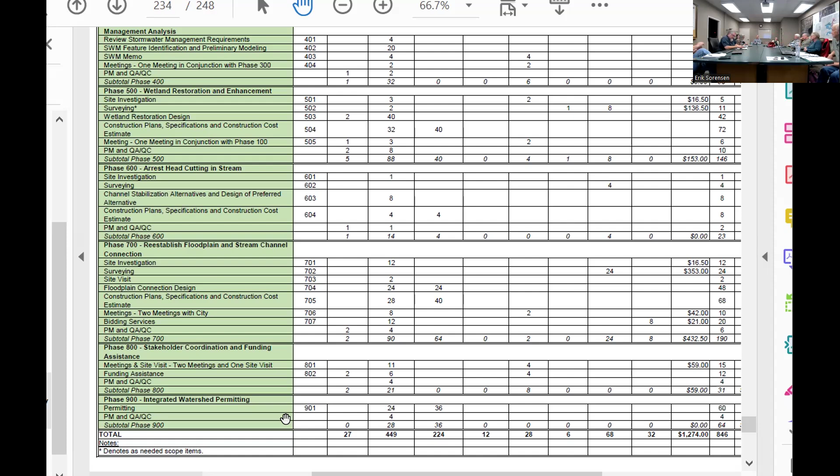Thanks. One more question. Going back to the slide that showed all the components. The delineated wetland has got a straight edge right where the property boundary for the Ziegler development is. On the lower right. Yep, lower right. And that polygon underneath it, north of the path, is the one in question; there's got to be a way for the city to acquire that. There was a plan in place, but it didn't work out.

So anyway, is it possible for your phase 7 to make a recommendation regarding the benefit to the city of acquiring and bringing that land into the Graber Greenway? Because it seems to me like the Greenway itself should consist of the city's path and the unfortunately named Pheasant Branch Ridge Drainage Way, which I keep wanting to rename.

But that parcel and the path, I think you can see it on this. Oh yeah, there it is. So all those houses on the north side of Whittlesey Road, their backyards abut a big ditch, and then there's the path, and then there's the drainage basin. But it seems like that should all be part of the Graber Greenway, no?